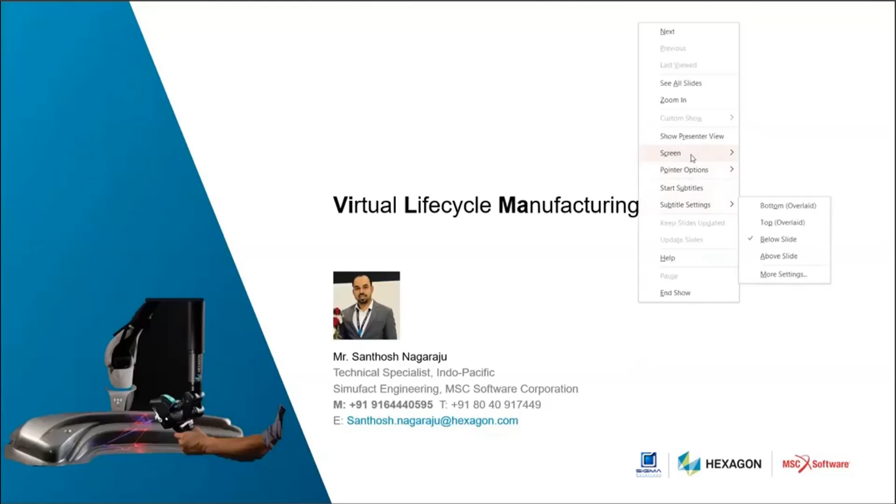So virtual lifecycle manufacturing. Before we start, I just want to put a couple of points from my experience. I have worked in the manufacturing industry as well as in the software field. Today the industries are majorly looking at industry 4.0, like adoption of industry 4.0 and smart manufacturing solutions.

So this is a solution. You can go to any manufacturing industry or supplier and you can propose this particular kind of platform we have. So I strongly suggest you pay attention to it. It might be an easy selling point for you because every manufacturing industry is looking for this solution. VLM, or we call it virtual lifecycle manufacturing, or ViLMa.

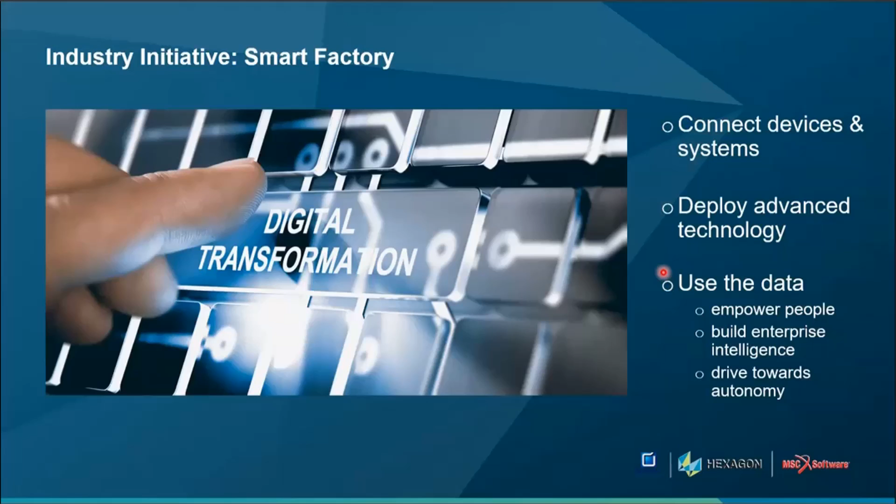So this is what the smart factory is all about. It talks about connecting hardware and software, using the advanced solutions, and using the existing data from the shop floor to optimize the existing process. So what are the solutions we have for that?

If you go to any manufacturing industry, they might have different departments like the design department, engineering department, prototyping and manufacturing. Each department works separately. The design department will have the CAD related data or virtual measurement data. The engineering department will be working more on designing, taking the drawings input from the design department.

Prototyping and manufacturing are more about actual or physical testing, where they do the actual manufacturing processes. Manufacturing is about how we implement it at large scale on the shop floor.

So what we do is we connect all of this. We have a platform where we can integrate simulations in each stage. Like I can do a design, in the sense I do the CAD modeling of a particular design. I send it to the engineering department for the analysis, like whether my CAD design will take the required load, what is the durability. Those studies will be done in the engineering department.

Then it goes for prototyping, in the sense testing, physical printing or physical manufacturing of a couple of parts and checking the functionality of the design we finalized. Then it will go for actual production or large-scale production. So all of this we can support with our multiple tools available.

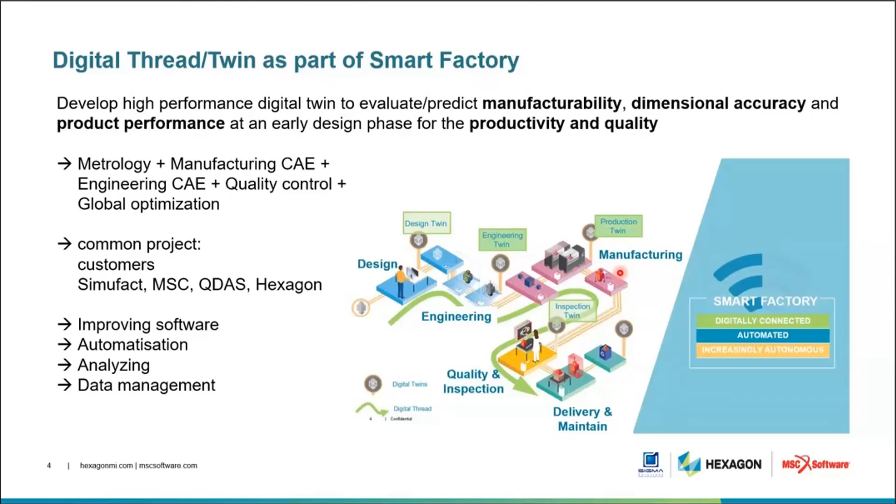So what are the simulation tools we pitch? When we talk about design and engineering, it is purely MSC tools. So you find a customer. He might be a sheet metal component manufacturer, he might be just doing body welding for an OEM, or he might be doing just component-level manufacturing for a major OEM or automaker.

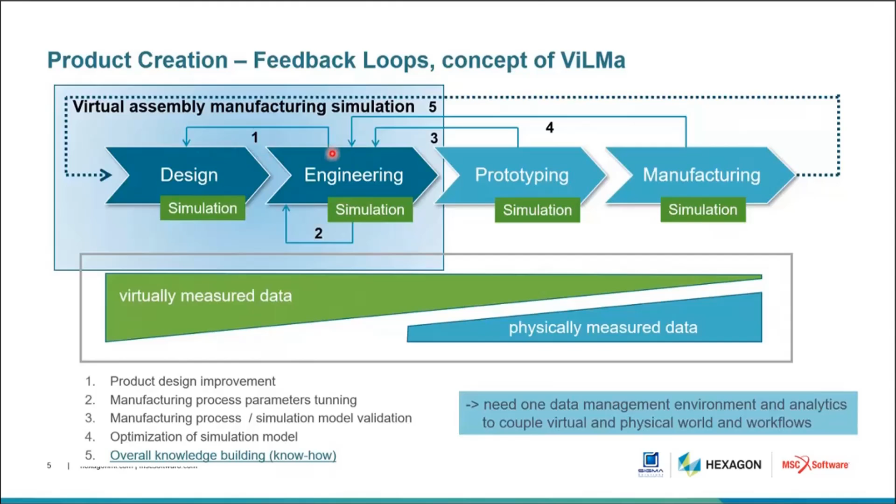Just find them so that we can pitch design and engineering tools for lightweighting or material reduction, topology optimization. Then when it comes to engineering, what will be the durability or strength of that particular component once we've done the lightweighting. Then we go to prototyping or manufacturing.

This is an example of Audi where we had a continuous workflow. We start with the press shop, where we get components from different suppliers, because in car manufacturing there are multiple suppliers; the whole frame won't be done by a single supplier. The door will be manufactured by supplier A, and the frame by supplier B. Before it reaches the OEM, we can scan the door manufactured at the supplier's end, take it into our ViLMa platform, and see the gap between the frame and the car door. So before it actually assembles, we can have the visualization.

For example, if we have different suppliers, you can just scan the manufactured component and send that scan data to the OEM. We receive the scan data, put it into the mainframe, and understand where the deviations are, how best it will fit, what the flush graph is, and other things.

If some rework is required, we can immediately send feedback saying the deviations need to be corrected, so there is no logistics involved. You need not send the physically manufactured part over to the OEM, have them put it into the mainframe, understand the deviations, then send it back to the supplier for rework.

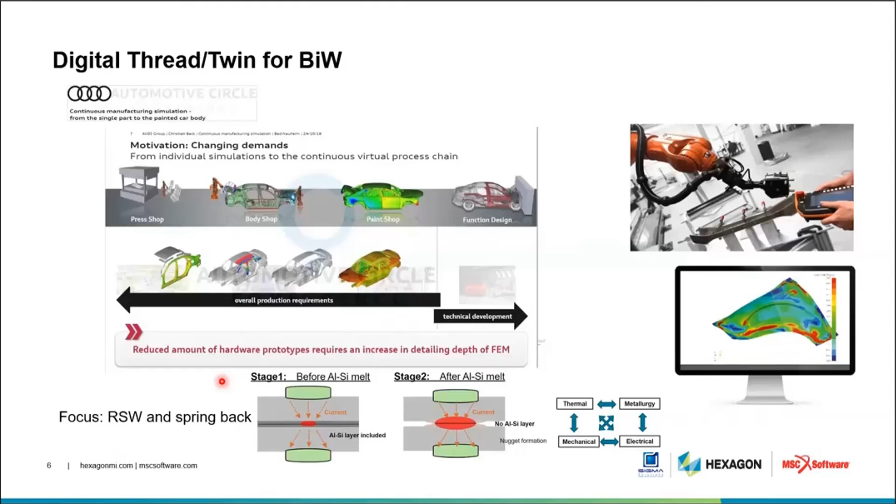So this is a solution. If any customer is working on prototyping and manufacturing, there are some suppliers who may not be interested in design and engineering tools, because they are not responsible for design and engineering. They get the geometry from the OEM. Their job is only to manufacture as per the given drawing or design, so they have no control over design and engineering. So for them, we can suggest tools

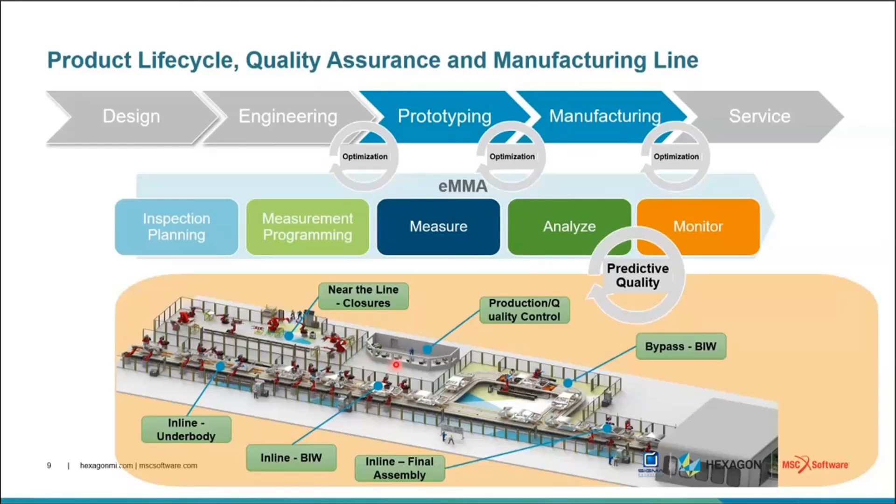where we talk about CMM or measurement. We can go to their shop floor and understand how quality inspection is done. They might be using CMM for dimensional accuracy, or a scanner for whole body scanning. In that case, we can offer measurement technology for the manufacturing industry: CMM, coordinate measuring machine, portable measurement arm, laser tracker, white light scanner, and this is more flexible. It can be adapted for any kind of measurement.

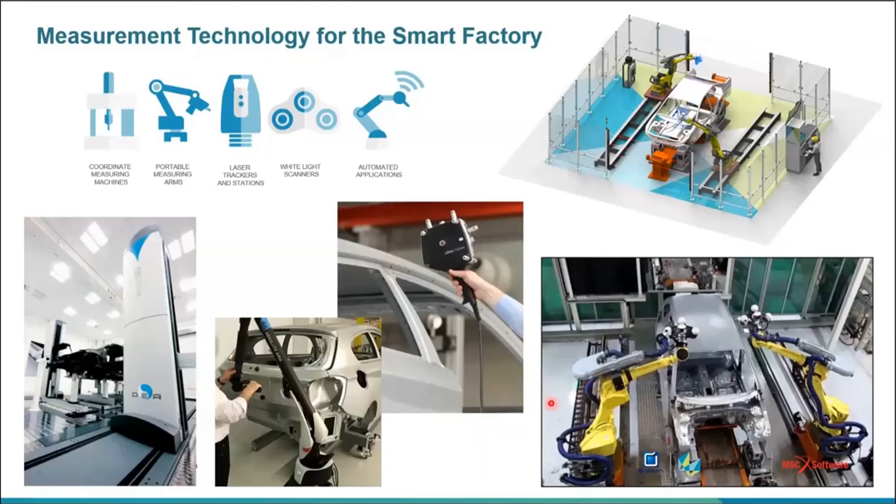So you can go to any manufacturing industry and talk about our inspection tools. The great advantage is that all of this scan data can be directly converted into a CAD model or STL model. There are a lot of competitors when it comes to scanning, but not everyone can convert scan images into an STL file that we can use for further FEA analysis or data preparation. So this is the solution if a customer is only doing manufacturing and is not into design and engineering.

So if we have a manufacturer, what are the solutions we have? For example, a supplier who is a car door manufacturer has no control over design changes. We can talk to him about the inspection tools we saw in the previous slide, or about how we control distortion or optimize the existing process.

You might be doing RSW welding, or gluing between the small component and main frame, or brazing or any type of welding, or a hemming process in the sense of mechanical joining and hemming.

So we can go to them and we can talk on individual process optimization. So if they are doing riveting, we can go and suggest to them: we have a rivet optimizer. It tells you which is the best way to rivet so that you will have better strength and you can avoid distortion during the riveting process.

If he is doing a welding process simulation, we can go and tell him that if you are welding with 3 robots, we can optimize the welding path in order to control the residual stresses and distortion, and also in order to improve the productivity of the process. So these are the solutions we have.

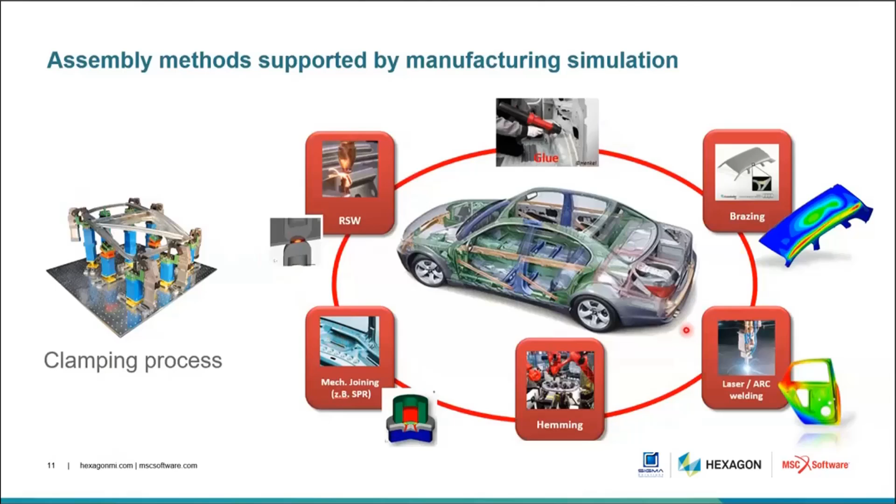If it is an OEM, we can combine all of this: design, engineering, prototype, and manufacturing. So we have a solution for each stage. We have a solution for design, a process simulation tool for engineering, a measurement tool for prototyping, then process improvement tools, which are again Simufact and FTI. So all of this can be combined together under eMMA solutions.

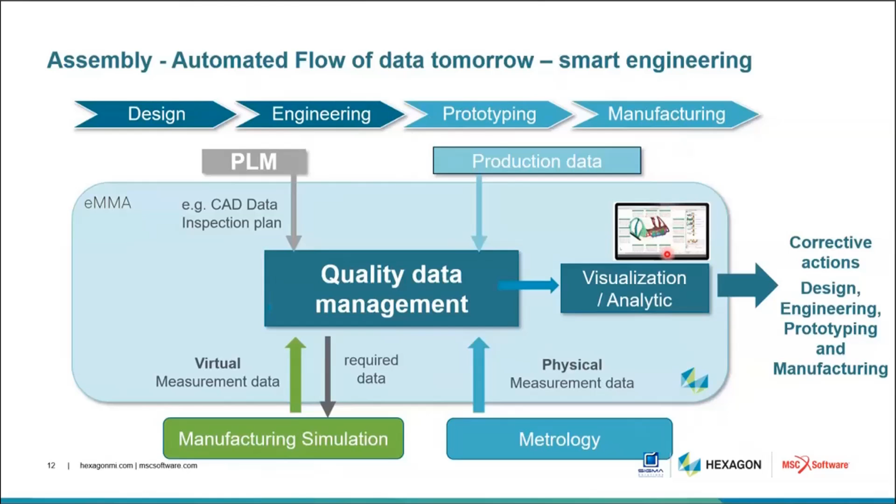So if they want to have their own kind of GUI where they want to monitor all this process, we can create a GUI based on the customer request.

So this is an example of how a data-driven workflow works. This is stamped at the customer location. Then we have the stamped part. We do scanning and it captures some critical dimensions of the car door. Then it is sent to the OEM. They will certify or send feedback on whether this is okay or not. If it is okay, you can start shipment. If not, then you will rework and correct the critical dimension in the given design.

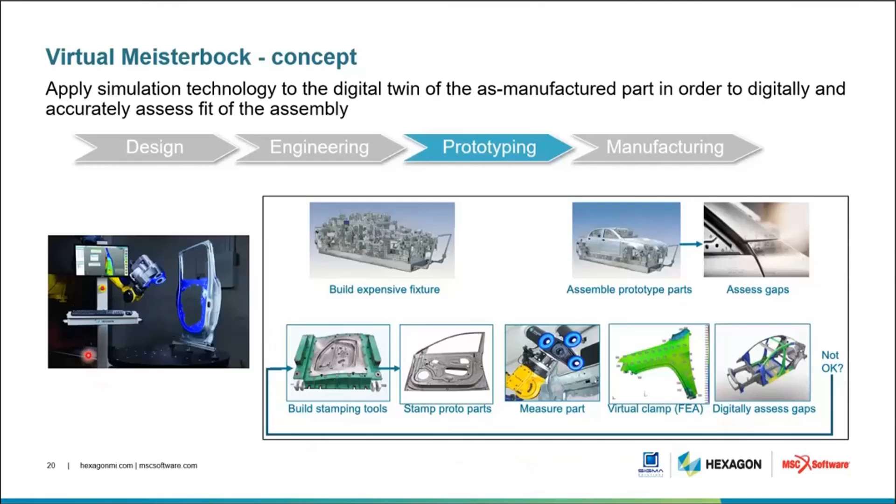So this will save a lot of logistics money. Also, this will save a lot of time for the actual car manufacturer. This is a critical pain point for any car manufacturer and supplier. I think they are really looking for this kind of solution.

So this is another example of how this data-driven approach was taken into the Hexagon digital thread, which includes manufacturing, process simulation, then measurement, then the eMMA platform where we will gather all the data and see the fitment and assembly-level monitoring. Then we can suggest to them if any modification is required, and it can be done on this final data management tool we have. All of this data can be saved in our cloud-based solution.

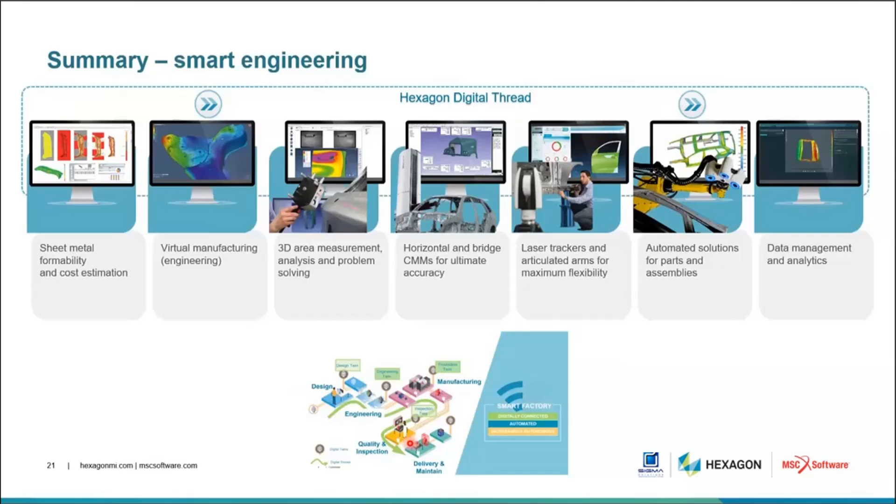So at the end, if we go to any manufacturing industry, they might be working end-to-end, including design to quality, or they might be focusing only on design or manufacturing and prototyping. So we have solutions for each stage. We can go and talk to them and optimize the existing process so that they can save a lot of time and money, so that they can justify their investment with us.

So in conclusion, we have a high-performing digital twin solution based on CAE technology, in a sense simulation tools. Also we have manufacturing error prediction, which is more like optimizing the current manufacturing processes with high-end technology, then optimizing the complete end-to-end solution, starting from design to quality. So you can pitch any of these solutions based on their area of focus.

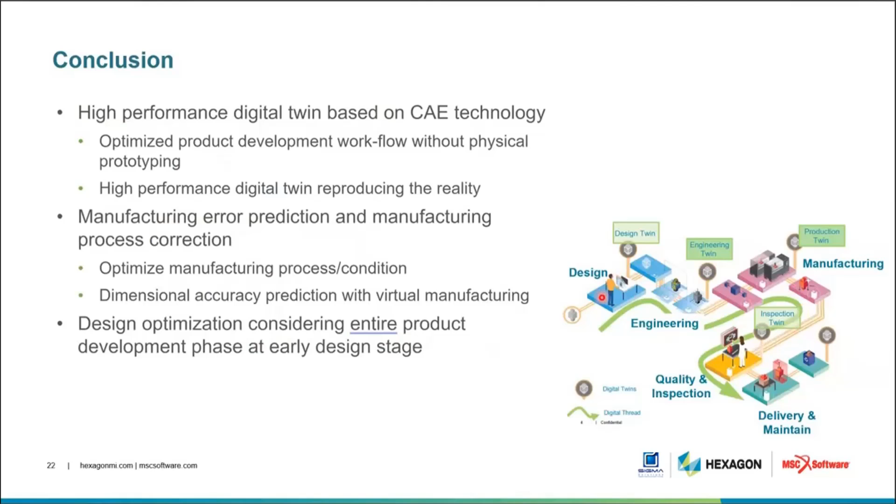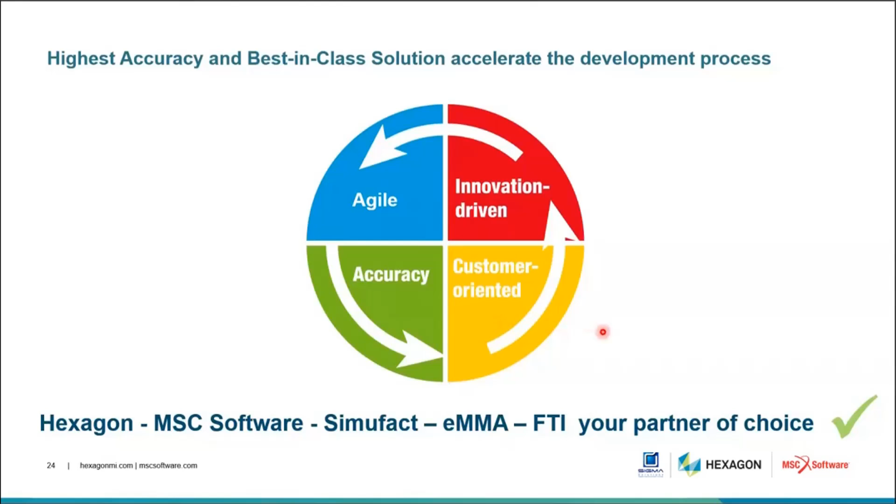So what it does is make them more innovation-driven: they can change the design, it becomes more flexible. Then they're agile, in the sense that any design change can be accepted at any point in time. We can improve the accuracy, and it is more customer-oriented, in the sense that we can reduce scrap and material waste, and at the same time improve the profitability of any factory or manufacturing unit.